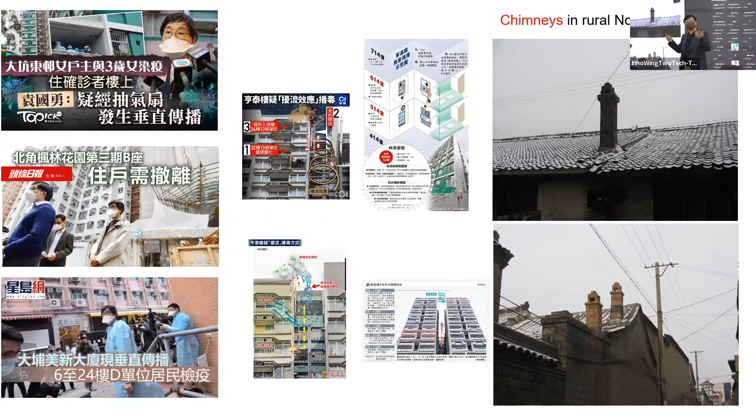In the media, you have all kinds of interpretations - the turbulence in Heng Tai, the first outbreak early on, which Professor Dennis Liang also investigated, and then we have the recent Dongman-Lou, I forgot the English name for it, and many different others. Of course, chimneys - we know this coming from my hometown, where the chimneys are above rural housing. And we don't have those chimneys in our buildings, of course.

Other questions also come across. If you have something with vertical spread, how do you reconcile that with expired aerosol transmission, short-range airborne? And how does toilet flushing or exhaust fan use affect transmission? In Hong Kong, we worry whether we should turn the fan on or not when we use toilets.

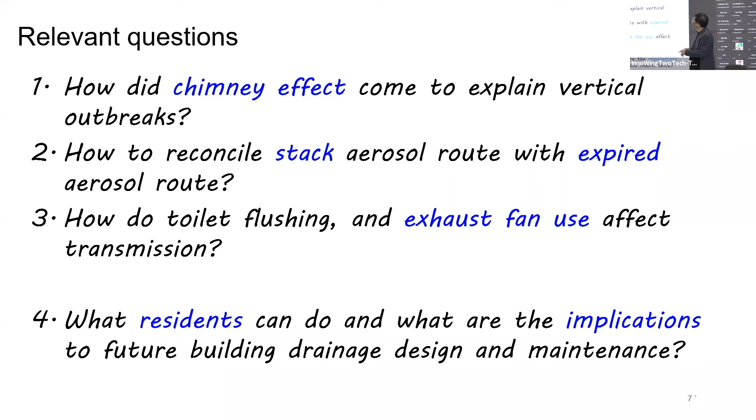I hope to propose something, and then discuss what residents can do and the implications for the future. This whole study is still ongoing, so what I described might not be 100% correct.

Perhaps it's useful to go back to the purpose of the drainage system. What does a building drainage system do? It does a very simple thing: it discharges wastewater from our daily life, which needs to go down from a drain to the sewer and leave the city.

So you discharge wastewater, and when you don't have wastewater to be discharged, the pipe contains air, and that air is not so good. So you need to separate what happens in the pipe from where you live. What do you do? You put a so-called water seal.

It can be in a U-trap. A U-trap is normally between 50 to 75 millimeters tall. It's interesting - it can sustain or hold on if you have 500 to 750 Pascal. That's all. If the fluctuation is more than that, you might destroy it.

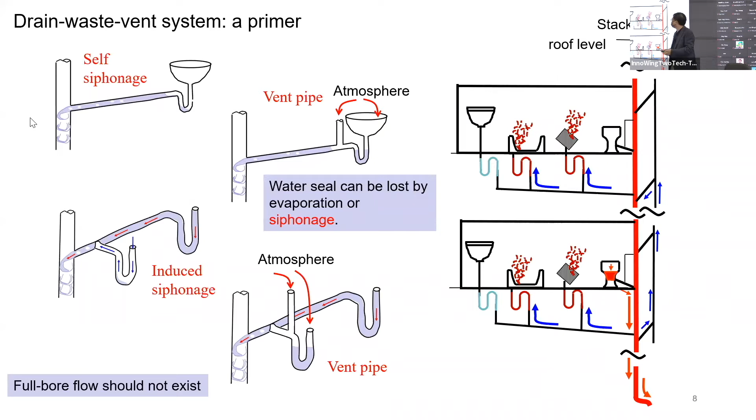So let's call this chimney transmission. Learning about this chimney transmission has been a long story. It really started with what Professor Dennis Liang just described, the Amoy Gardens outbreak. In this outbreak, someone visited this particular flat, flat 7 in block E, and infected more than 300 people in the estate.

In a nutshell, we can use wind airflow to explain the overall distribution among the buildings. We can also explain why in block E you have a spatial pattern, with the index patient at flat 7, and very low risk at flats 5 and 6.

At the time, I told people in Hong Kong to buy east-facing flats. If you buy east, the wind is better because our wind comes from the northeast or east. So I bought my own flat facing east. Probably I'm safe.

However, we also explain why flat 7 was mostly infected by the wind blowing - all these flats in color were infected. What we did not explain was why flat 7 had this distribution and how those people were infected, mostly upward with only 1 or 2 small downward cases.

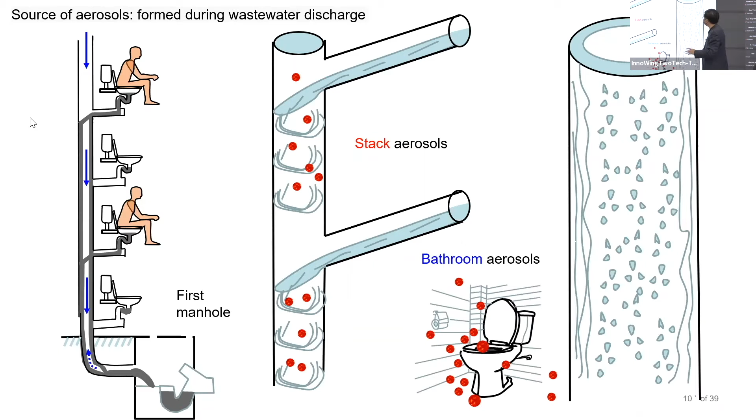So during the pandemic, in hospitals we could not find the virus in the air, but we would find it in bathrooms - bathroom handles, bathroom surfaces, wash basins, and so on. As time ran fast, we forgot about Amoy Garden. We did not do a lot of studies on this; we studied a lot of short-range airborne transmission instead.

This time we had the experience, so we were better prepared, and students were able to go to this Block X to do some tests, led by my former student, Professor Pang Jian. The experiment was very simple: inject tracer gas through the toilet water - you cannot remove that water seal - into the drainage pipe, and measure tracer gas in other places. You find them there, obviously. The question is, how did they get there?

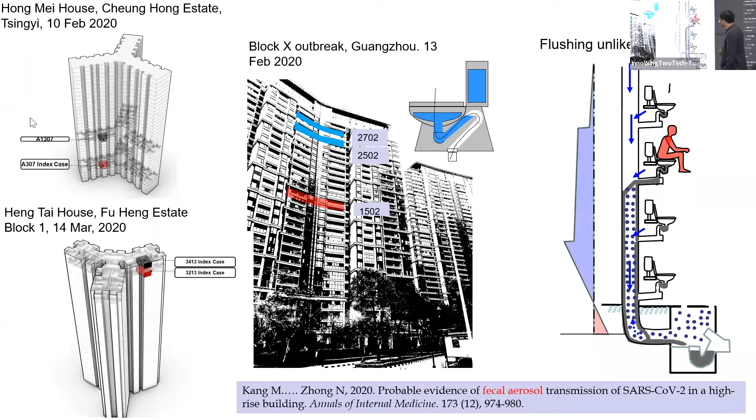However, you see, all the upper families were infected. So it must have something to do with the chimney effect, right? This is natural. So what is the chimney effect? Exactly - it's a very old topic. Franklin studied that; he had a stove and probably did the first scientific study of chimneys.

Of course, the buoyancy principle goes back to Archimedes. It took me two weeks of hard work through Google Books and archives to find Péclet. In fluid dynamics, all students know the Péclet number, analogous to the Reynolds number. He produced a very simple formula telling us how the flow through a chimney works as a function of height. At that time, 18th and 19th century, a lot of chimneys were built for factories during industrialization - that's why chimneys.

So for this chimney going up, when it's warm, if the chimney is leaky, air goes in at the lower part and comes out the upper chimney. So there is a neutral level. In theory, if all the air always goes upwards, lower flats would not be infected. This is what we have observed.

However, there are many upward flows. Being high rise - what is high rise? It's high, that's it, the H is high. There are many pathways: stairwells, top-down shafts, rubbish chutes, lift hoistways - they all go up. Then you have semi-open spaces, re-entrant spaces in Hong Kong. Professor Yin has described this a lot of time - semi-open light wells. Also, the latest outbreak may have leaked from a window upwards to the next window.

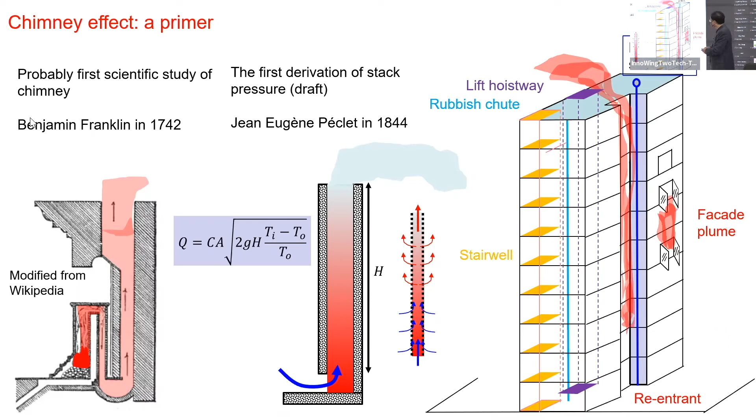Coming back to Block X in Guangzhou, at the time we thought it looks like the flow is upwards. Normally the simplest case is considered, but in reality it's more complicated - there are multiple neutral levels. Let's consider one neutral level: if you're in that case, only those above can be affected, though it can also affect someone just below, as long as they are above the neutral level. If your index case is below the neutral level, only the upper flats can be affected.

Interesting. So we thought this might be the reason, and the logic becomes simple. In winter, your indoor is warmer, and our pipe is normally outdoors. In theory, the air inside should be similar to outdoors. But the air might leak, entering the stack from indoors, so the air is warm, and then we should always see an upward infection pattern. This should not happen in summer, because our rooms are air conditioned, so the room air is cool, and the air goes to the chimney. There should not be air infection in summer.

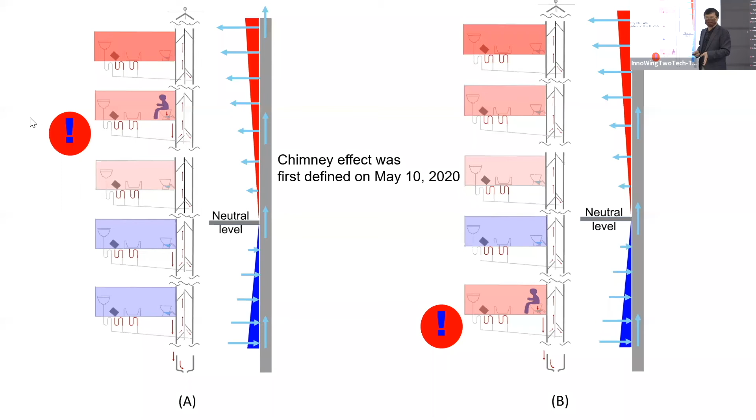The Luk Chuen House outbreak happened in June. We got into trouble because, briefly describing the red color index case, the upper level got infected, but also somebody at a lower level. This is in summer, so if the theory is right, it should be reversed. It should not be the upper level infected, it should be the lower level. It's interesting that these two vertical columns were actually coming from neighboring flats.

There is something very strong here. I've never seen this system before. It's very unique, innovative. At the time, probably there were no vent pipes, only drainage stacks, two drainage stacks, but the drainage stacks are connected. So when you use this toilet, the other pipe stack becomes your vent.

Of course, because it's so narrow, a lot of people, when doing maintenance of the toilets, cut them. There are only a few still connected, but that's still enough to get a few people infected.

In this particular case, which I won't discuss today due to time, there's also a horizontal cluster where opposite flats were infected. We did a measurement, interestingly, in June, and injected the same way, tracer gas into the toilets. We found they leaked to other flats. So even in summer, you still see the upward flow.

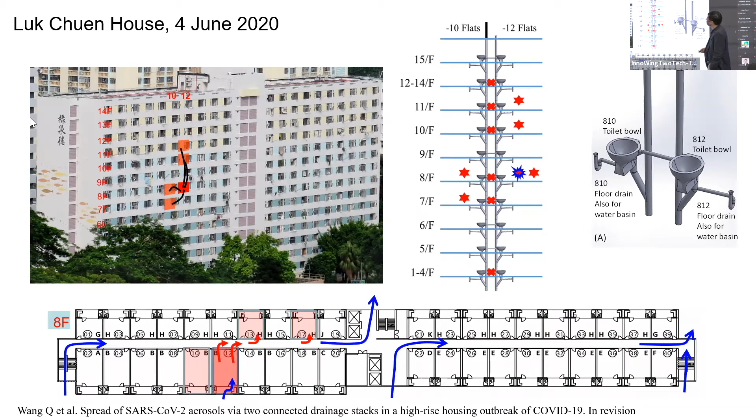Some of us believe, oh, it's not the drainage system, maybe it's the facade plume, from the window going up. Actually we tried that, and it indeed went up. But the wind direction that day was the opposite compared to the time of exposure. So this got us a little bit into trouble.

In Hong Kong, as I mentioned, we have more than 13,000 cases, and we had 5 waves. In the first and second wave, earlier in the pandemic, there were 2 outbreaks as I reported earlier. This vertical one was very small, only 7 cases involved. And in summer, the Luk Chuen House outbreak was the only 1. This is very interesting, only 1 out of all those cases. Then at the end of 2020, early 2021, we had 9 outbreaks. That's the time we thought a lot about it.

Of course recently we have 3 outbreaks. So if you put all this together, you find it's about 100 cases out of 10,000, about 1% of the outbreak. So relatively speaking, it's not that many. So why we worry is because you need many of them to get one case. But now, as Professor K.Y. Yuen mentioned in the newspaper, with only a small number of cases, we already have 3. It's indicating possibly something, whether this whole thing's transmissivity is really high, whether airborne probability is high.

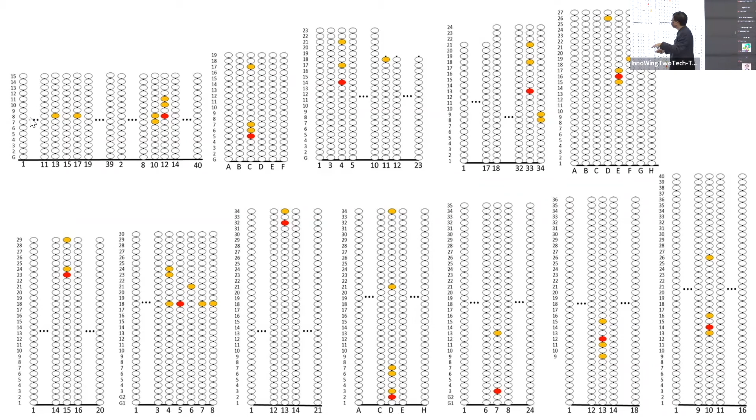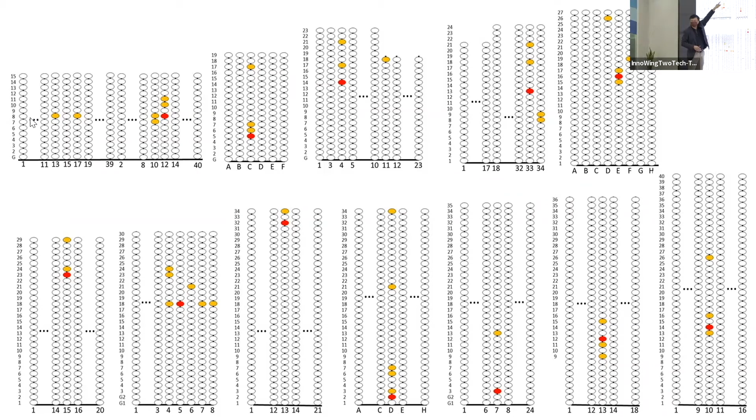So there is one way to describe that - you draw every home a circle and stack up. There are many columns, like in Luk Chuen House - in this one single building, there are 40 columns of flats. And it happened that the index case was here. He infected the family above and their neighbors, one below, and also on the same floor, across from his floor. In general, there is a pattern, right?

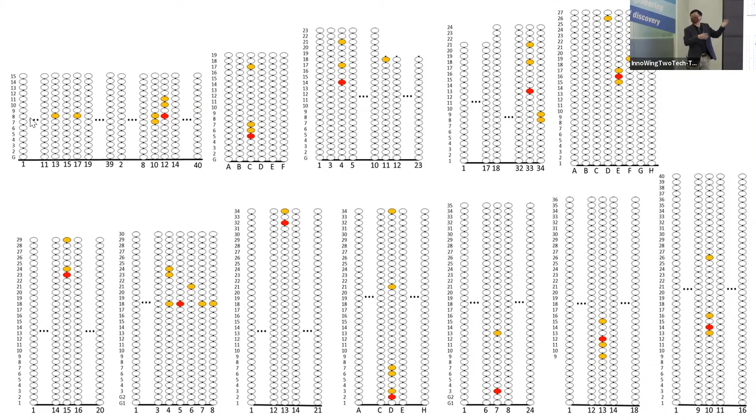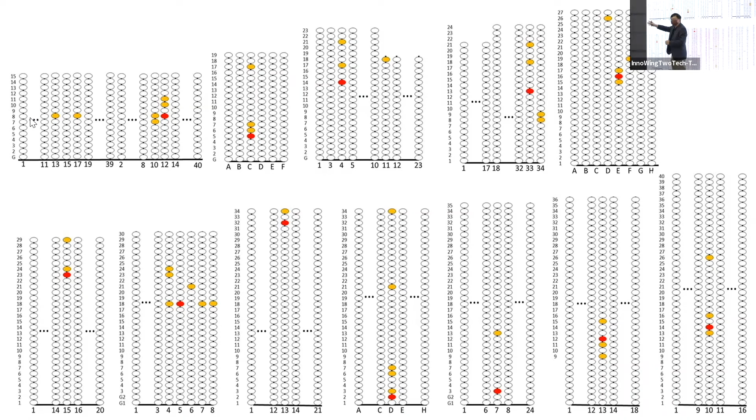That pattern is - I can give you statistics, there's no need, it's statistically significant. There were so many, 40 by 15 flats - why only along this, right? It's generally along one vertical column.

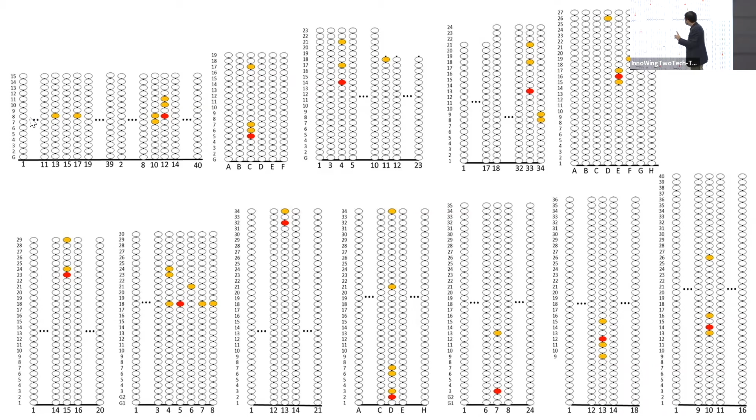That's number one, where you share a vertical drainage stack. Second, you could have a situation when two share one. They are one, right? They are one, like in Luk Chuen House.

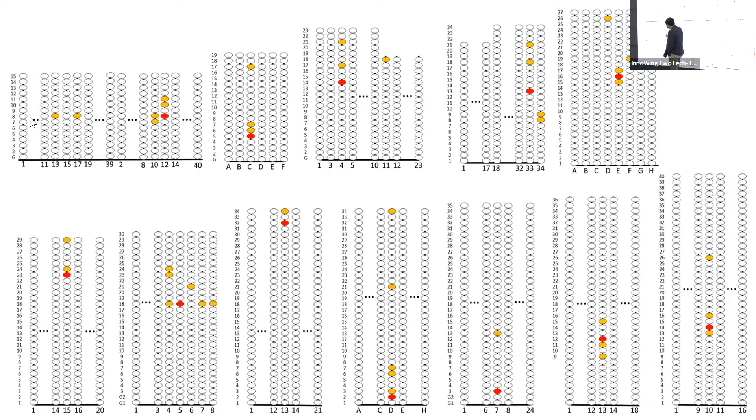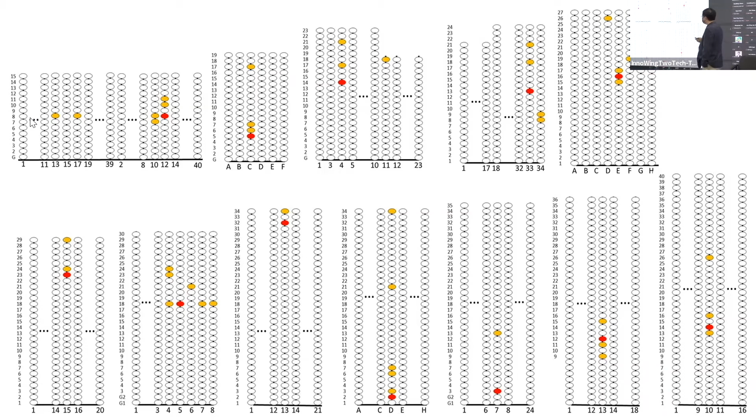Although it's difficult to find, there is only one building that gave us trouble - even today, I don't know. It's this building. The index case was there, and then the others. Of course, there might be other transmission routes, but the remaining ones consistently tell you one thing - they are all in these buildings.

If you go back, sorry. Oh - cannot go back. Oh, here.

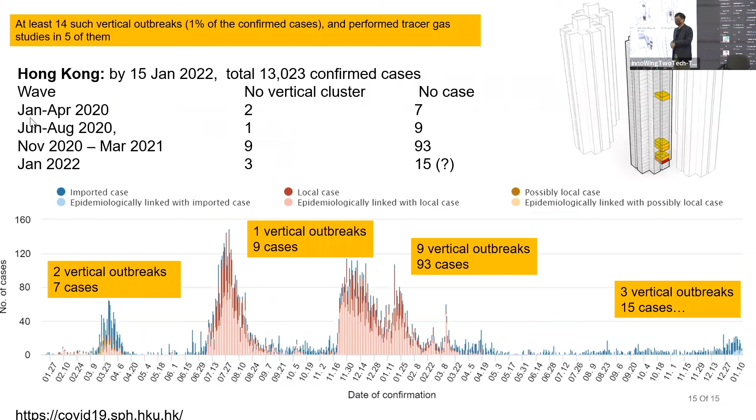These buildings happen in either public housing or private housing - buildings with re-entrant space, without re-entrant space, with light well, without light well. They can be different shapes. It has nothing to do with possibly.

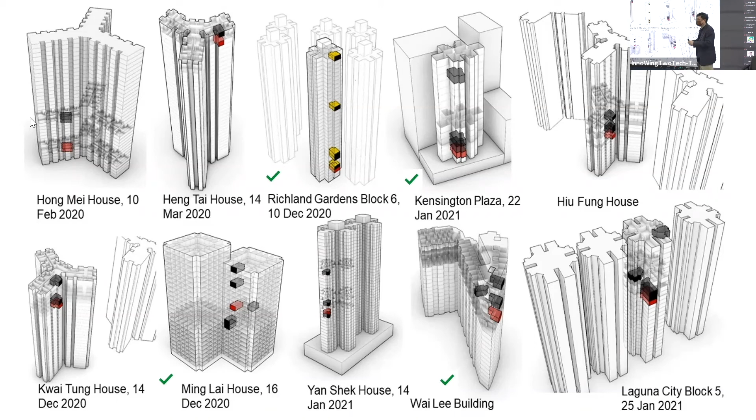Those are not the most important. Most important is this vertical one. That's why we think possibly the drainage system - the only thing they share is the drainage system. They are very, very different, you know, different from one another. So this is why we suspect it's the drainage system that plays the most important chimney effect role, okay?

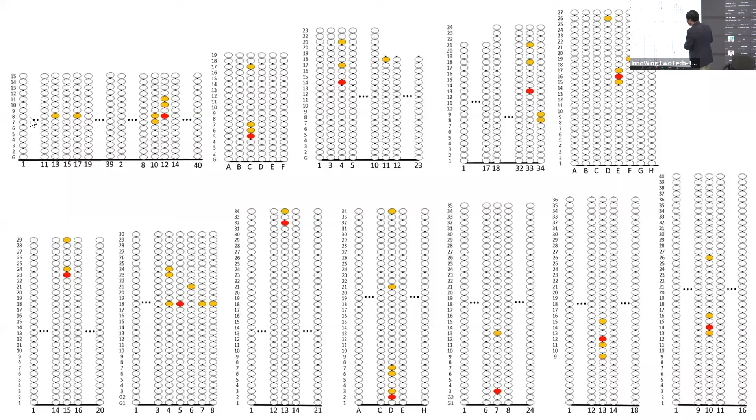And in this hypothesis, you immediately produce those aerosols, and those aerosols, as we described earlier, leak into the room. We now know this room, after a lot of monitoring, it looks like the ventilation rate in this chimney is 20 liters per second. So it takes about 10 to 20 minutes to empty this stack, okay? And so then by inhalation.

So here there's one important question about use of exhaust fans. When you have this chimney effect - and before I mentioned this - there's another thing we found out, is that the humidity matters in these pipes. Humid air is lighter. So most interesting thing, if you use a shower, then the stack effect is huge. All right, so more complexity. So even in summer, this upward flow exists - it's not just non-existent.

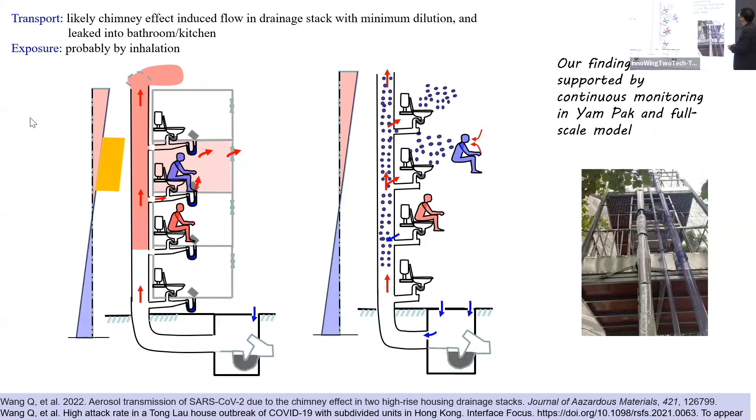Now I suspect saliva is important, getting into wash basins or even toilets. A subsequent hypothesis might be made, though it cannot be proven: when you do whatever you do in front of your wash basin, you leave some sputum and saliva on the bottom of it. Assume this is the infected person - of course when they discharge, they cause a vertical outbreak. If some of it is not discharged, the next user - we encourage hand washing - the next user might be exposed to the aerosolized material.

There's no direct evidence, however there was one cleaner in Nanjing airport - that's how I ended up locked up for an additional week in Beijing when I was doing my sabbatical, telling my boss I was working in the hotel. That's why we have a few small papers warning people that there is a possibility - this is a possible route.

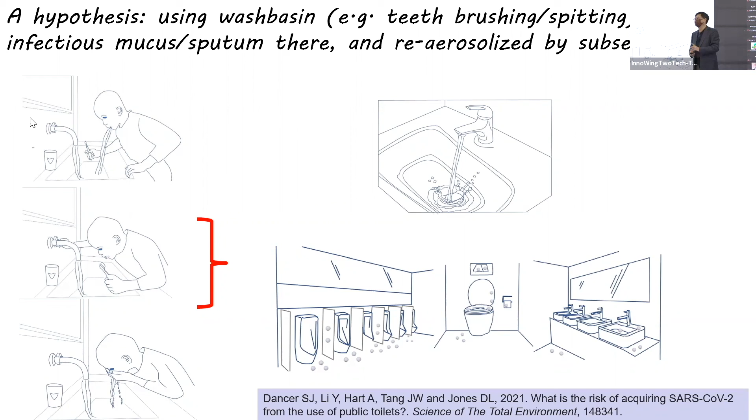According to our Hong Kong medicine study, 30% of people in Hong Kong actually spit into the wash basin in public toilets. So it's a little bit of knowledge to learn.

Now, quickly going through what we need to do, finishing up - I found out the building department has a very nice website with videos telling people what to do. It's on YouTube, but I saw not so many people visiting it, so I try to help them promote it. I don't know them personally - I know some of them - but they did not tell me to do this. I just found it useful.

Fill water traps, do not forget any holes. Simply, if you don't use your bathroom for a long time, perhaps you have rubbish or use temporary storage - you better find the traps and fill them regularly, every 2 weeks. Keep the door ajar or open when you turn on the exhaust fan, and do use the exhaust fan - it will improve ventilation.

And we still suggest perhaps you can spit onto tissue paper and throw it away through the rubbish bin. People also worry that this may cause trouble with the rubbish chute, but it's a very low probability.

Only if this worsens do we go to that extreme. I'm not recommending you wear a mask all the time you go to toilets, but only if this Omicron situation got so much worse, you'd do that.

One important thing - that's why I described the basics of vents, drainage, and siphonage - not many people know this in the public. If anyone hears this, we have seen quite a few people change their systems. We know the need for change, each one of us knows, but perhaps it's best to ask a professional engineer to help.

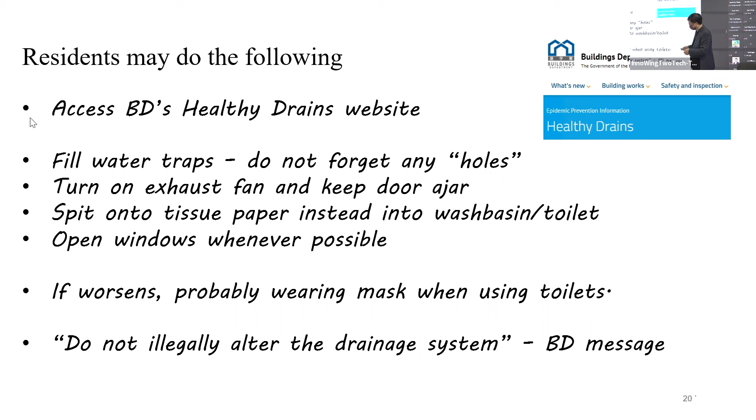Sometimes I suspect we don't monitor them. So when I visited some places, I could smell them - I mean, we all know what H2S smells like. You can smell them. So I feel there's perhaps a need to go beyond the pandemic.

It's just easy to ask - is there any other infection being transmitted by this route? It is because of the great effort put into the pandemic that we were able to identify these 15 outbreaks. There may be some others we probably have forgotten about, in the space of this 100,000 and probably even 300,000 vertical pipes. They are a concern.

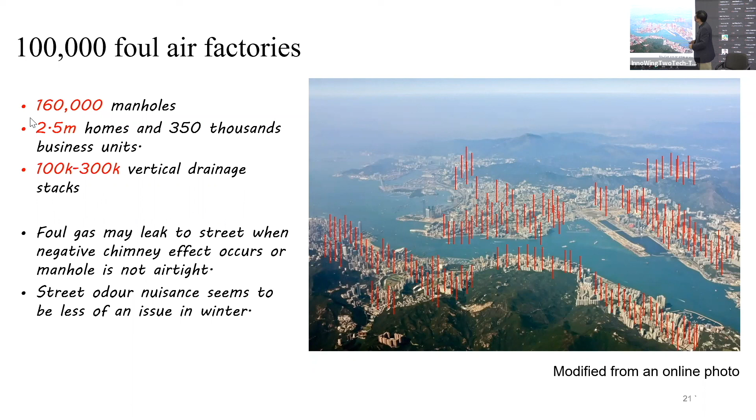So my summary: very likely the source aerosols form during discharging of wastewater. They are transported by chimney effect induced flow, because the chimney has minimum dilution, and probably enter through inhalation. So keep drains airtight, keep doors ajar, do not spit into the wash basin, and wear a mask.

So it remains unknown why these outbreaks are only observed in Hong Kong and Guangdong, not elsewhere. Thank you very much.